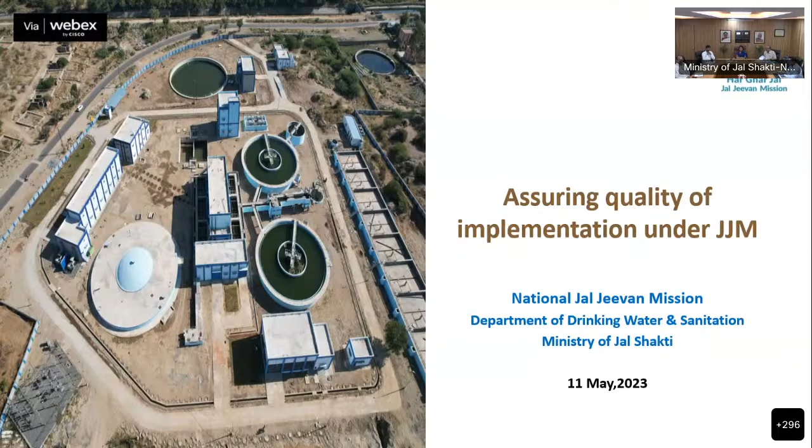First, why we need the quality monitoring system. As you are aware, our JJM goal is to provide adequate quantity and good quality of water on a regular and sustainable basis. But during field visits, we observed that functionality is not meeting the required standards, perhaps because we haven't given importance to quality at the design stage or implementation stage. If we give proper importance to quality from the start of the project, we can avoid this kind of problem.

Our objective is to design the system for an ultimate design period of maybe 30 years. But while reviewing DPRs, we found that some schemes implemented 5 or 10 years back are not providing the intended services, so we are replacing pipe material, replacing tanks. Why is this happening? Maybe the materials used on site are not of good quality, or maybe workmanship and the quality monitoring system are not appropriate.

So we need to focus on quality during the implementation stage. Most important, even if the DPR has been prepared with standard design guidelines, we have to make sure the infrastructure created on ground is in line with the approved DPR and approved practices. We observed that certain item specifications given in the DPR are not followed on ground in the same way, so the agency has to check those requirements. At some places, especially in village areas, we don't have very qualified and experienced contractors, and even some site engineers from the contractor side are not able to read structural drawings. So we need to provide assistance to them and have proper checks and balances so the work can be done properly.

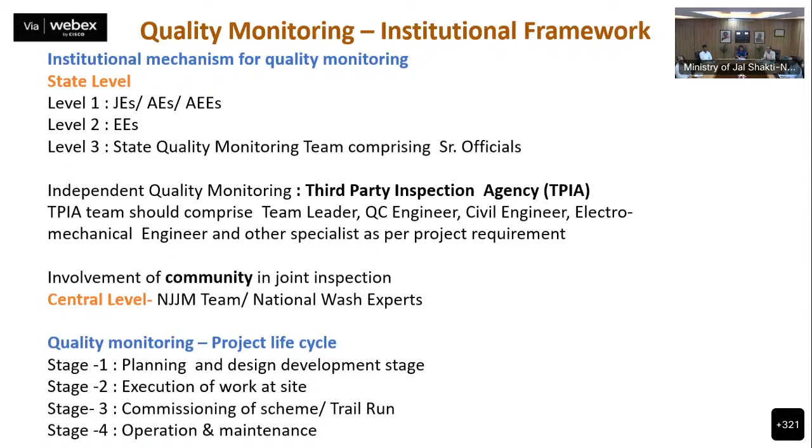Now I've tried to mention some key roles of the TPI agency. Generally, most places I found that TPI has the mandate to measure and verify the bill. But actually the role of TPI starts as soon as we award the work on the site, so TPI should be deployed at the same time we start work on the ground.

TPI should be engaged in reviewing documents. TPI staff must have copies of the DPR, tender document, work order, all statutory approvals, and IS codes, so they can understand the project, know the benchmark, what is required, and what they are going to inspect.

The second part is development of a quality assurance plan, which is very important. Normally, good contractors have their own quality assurance plan, while smaller contractors are often not familiar with it. This is basically a roadmap for how the quality system should be managed, what materials should be tested, when, and at what frequency. TPI agencies can facilitate this roadmap for state governments and contractors.

Other important things: each project scheme has different nature and components, so it's good to have a checklist of parameters for monitoring each component. One issue I observed is that TPI is often not aware exactly when a given activity is going to start, since a TPI agency may be involved in 100 or 50 schemes. So it's important to develop a tracker early on, showing at what date and time which activity is happening, so that the right staff can go to the site at the critical stage and do proper quality monitoring.

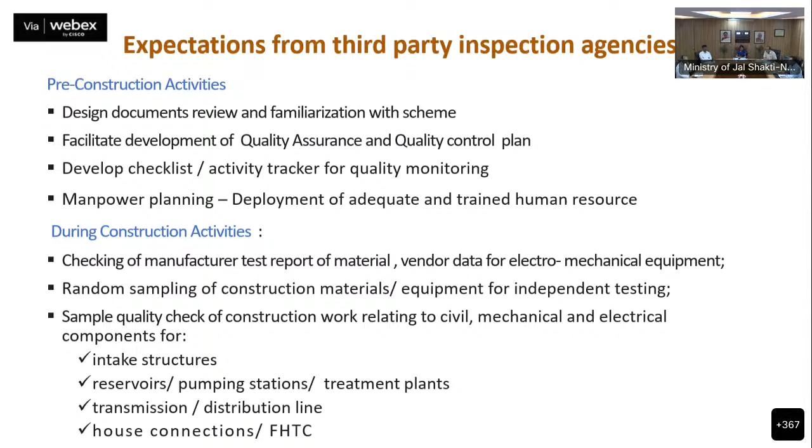Similarly, for the transmission line, once the pipe is laid at the ground, they should ascertain that the pipe has been laid at the appropriate depth, with appropriate trench width and proper cushion for the pipe bedding. We'll discuss some examples at the end of the presentation showing bad practice and good practice to give understanding on these aspects.

About compliance, we discussed the DPR compliance. What we observed on site is that maybe the DPR was prepared one or two years back, and due to various issues like site condition, land issue, or approval issue, the location of the treatment plant or the tank might have changed. However, the design is not being revised.

So it is the responsibility of the TPI agency to ensure that if there is any change in site condition, the design has been revised accordingly, and construction is carried out as per the latest design.

Another issue I'd like to highlight is about the structural drawing. Most DPRs don't include the structural drawing, nor the geotechnical survey. So when the contractor is on the field, they do the geotechnical survey, and if they find the DPR was designed with different geotechnical properties, it is important to revise the structural drawing to suit the site condition, because it will have a major impact.

Another important aspect is the measurement of work done by the TPI agency and recommending payment. I'd like to mention that we recently visited Assam, Lakhimpur district, and saw a best practice happening there. They have developed an app where they enter all the details, whether the pipe has been laid at the appropriate depth, whether concrete testing has been done. Once the information goes to the concerned person, they approve the bill. The same practice can be followed at other sites too.

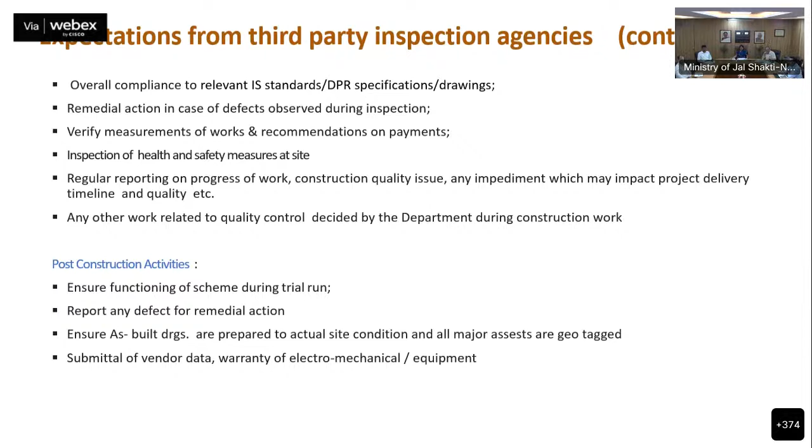Now we'll talk about the testing of material. When we talk about testing, normally we use pipes and concrete - these are two major components of the work. In any project, maybe 60 to 70% of the project cost lies with the pipe material, so it's important that we give emphasis on material testing at the site.

So pipes - mainly two kinds of pipes are being used. One, metallic pipes - I have seen DI pipe used, and GI pipe especially in the hilly region. And if you talk about plastic pipes, generally HDPE and MDPE are used.

So it's ensured that with the batch number, the material has been tested at least at the manufacturer's end. Any person can see these things.

When we talk about the material's mechanical properties, certain tests have to be done in the lab. So it's important that we select the sample from the lot and then send it to the approved lab for testing, and ensure that whatever test result we get is within the parameters.

What I have seen is some states' sample reports are available, but they don't include all the parameters. Hardly, suppose 5 tests we have to do, maybe some places only 2 parameters, some places 3 parameters.

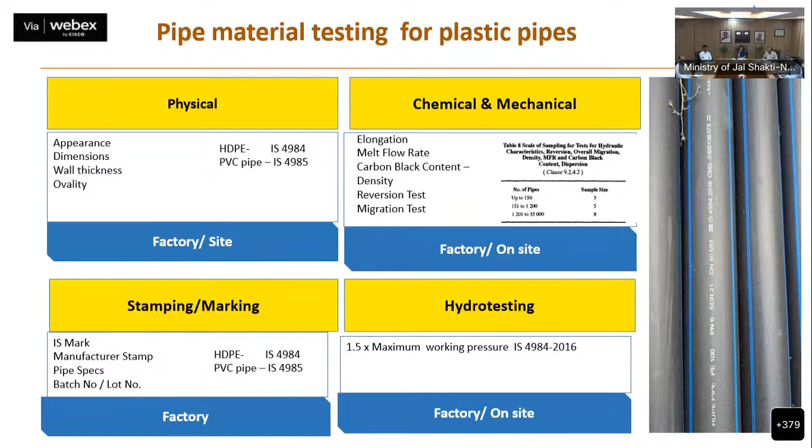If you are doing concrete work up to 5 cubic meters, 1 sample has to be collected. If it is more than 5 to 15 cubic meters, 2 samples have to be collected. Please ensure that cubes of size 150x150 are made properly. And when sampling, ensure it is done at least at 7 days and 28 days.

To determine the strength - why 7 days? Because if 7 days is not meeting the criteria, about 65% of strength should be achieved at 7 days, then straightforward the sample can be rejected. We can't wait for the 28-day rejection. So having proper sampling is an important stage of all construction work, and proper concrete testing should be done.

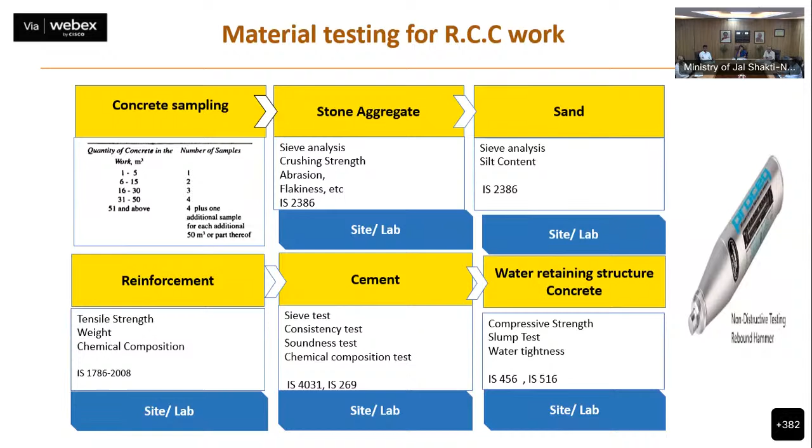This is the device which I have highlighted here. This is very important - these are all very basic digital instruments. For example, if someone wants to measure the thickness of the pipe, they can use the digital screw gauge. If you want to measure the inside-outside diameter, you can use the digital vernier caliper. Similarly, if you want to know the thickness of the coating, we can use the digital zinc coating thickness instrument.

Like how you are using the field test kit for different parameters, similarly we can have a kit of these basic instruments which can be given to the field staff. Whenever they go to the field, they can carry these instruments and measure the important basic parameters. I'm glad to know that Chhattisgarh, a couple of weeks back, organized training and gave this kind of kit to all the field staff for quality monitoring of basic parameters.

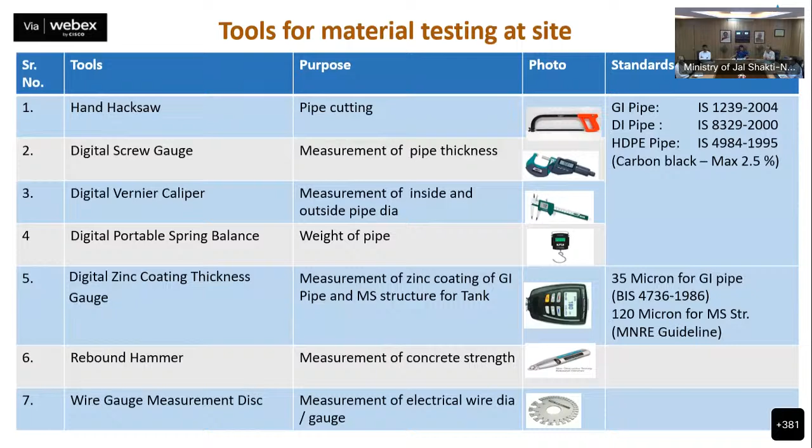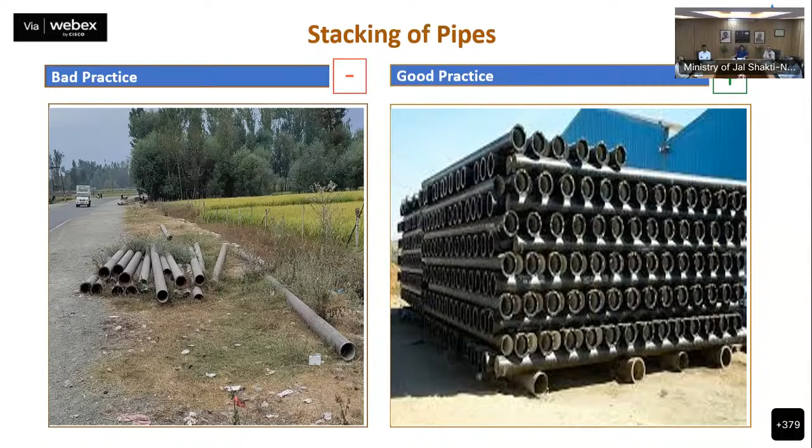Some examples from the sites - you can see some practices. It's not only about material testing and laying the pipe, it's also important that when you procure the pipe at site, how it is being stacked, how it is being loaded, how it is being unloaded and laid. Every important activity has to be taken care of, so it's always good practice to have proper stacking of the pipe material.

When we talk about pipe bending, especially for metallic pipe - if you are using plastic pipe, like HDPE pipe, they are flexible and can be bent up to a certain degree. But especially for metallic pipe, there is certain limitation. You can't bend DI pipe more than 4 or 5 degrees depending on the diameter. Once you try to bend more than that, leakage will start. So whenever there is a requirement for a bend, kindly use special fitting bends rather than trying to bend more than the prescribed limit.

Laying is one of the most important activities where we found a lot of improvement is required. As per the codal provision, if you are laying the pipe on the road and surface, minimum 1 meter depth is required. Although in the BOQ items you have 1 meter or 0.9 meter specified, in a lot of places I have seen pipes being laid above the ground.

Some places, you can see the example given here, even though pipe is laid in the road, hardly 10 centimeter trench depth is there in place of 1 meter. However, BOQ says that pipes should be laid 1 meter below ground. So kindly ensure that proper trench width is there. Minimum 200mm clearance is required because in future if you have to do maintenance work, there should be some space to use the equipment.

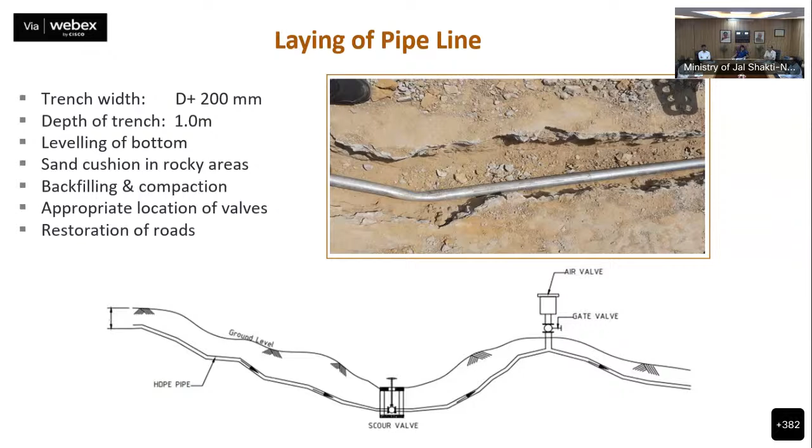Especially for placing valves, I have seen that in most places there is no detailed design of the profile of the pipeline. Normally we only get layout drawings, which don't include levels - what is the ground level, what is the pipe level. There should be a proper L-section. In case we don't have a proper L-section, it is the TPI agency's responsibility to examine whether the valve has been located at the appropriate place. Air valve should normally be at the peak point, and a scour valve for drainage purposes should be at the bottom of the pipe. These are very basic things we have to take care of while laying the pipeline.

This is a very typical example of a manifold, normally used in hilly regions. In one case, I found there are about 30 households, and directly from the tank, individual connections are given to each household, but the header is not of appropriate size. Each household connection from the tank runs up to 1 kilometer, 500 meters.

So instead of having all connections from the reservoir tank, we can have a decentralized manifold connection. We can take the main distribution pipeline, create branches, and use a cluster-based approach - maybe 5 or 6 households per manifold, giving 6 connections, and again from another branch giving other connections. This will make operation and maintenance much easier.

This will also reduce the cost of pipe, especially when using plastic pipes. I can see here the HDPE pipe is used, and construction might have been done about a couple of months back. After 2 to 3 years, the pipe is not going to sustain - it will become brittle because it's exposed to sunlight.

GI pipes, if laid above the ground, that's quite acceptable. But please try to avoid laying plastic pipes above the ground for long life.

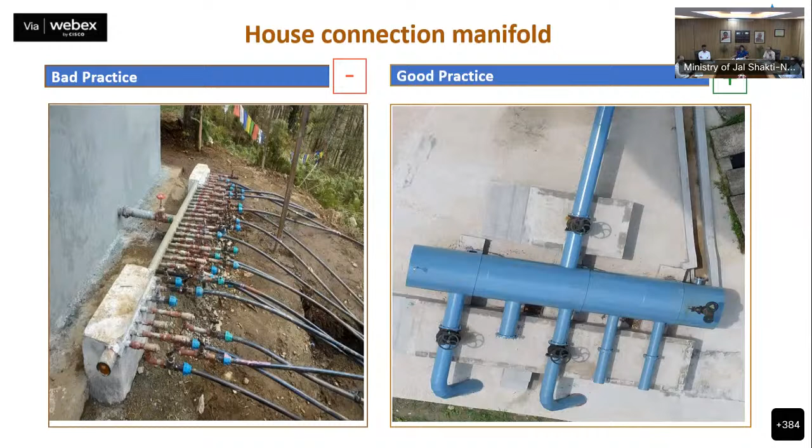FHTC is a gray area I found. In most places, except a few states, there is no consistency in providing the FHTC. In some places, FHTC through MDPE pipe or HDPE pipe is left open - you can see the right picture. On the left side, they have given a pipe above the ground with a proper tap, but there is no pedestal support.

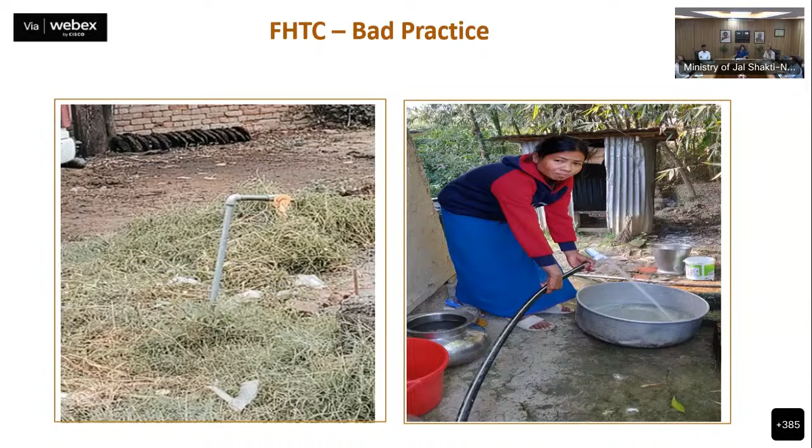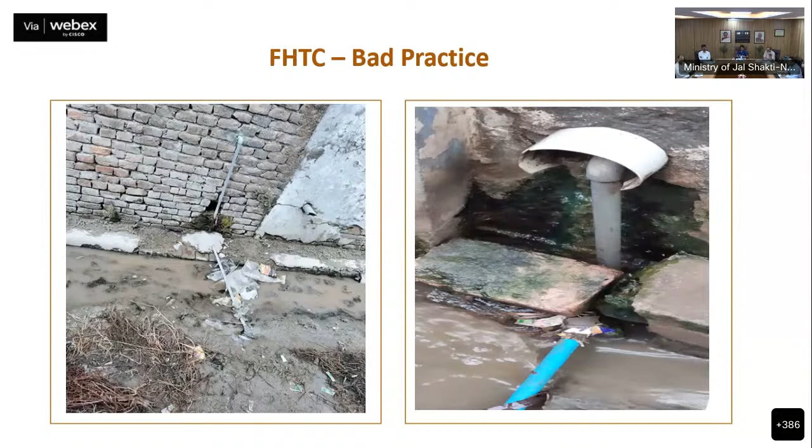In some places, the house connection pipe is laid near the drainage line, and there are chances of contamination. Even though your water is treated at the treatment plant and disinfected at the tank, once you lay the pipeline connection point inside the drainage, it is going to contaminate the water, and we won't have safe water at the consumer end. So kindly ensure this kind of connection is avoided.

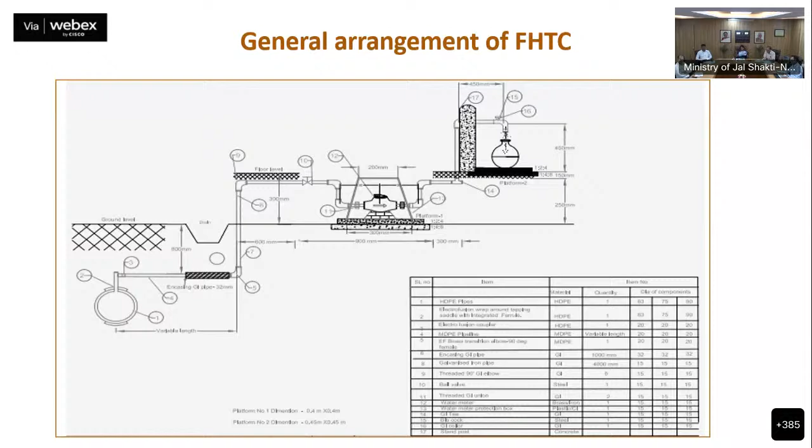For the benefit of the audience, I've also given standard drawings because I couldn't find any standard design drawings from the state during the visit. So this drawing can be used - you can see the pipeline is laid below the drain line, with a proper height for the connection and pedestal support. Similarly, this drawing shows how the platform has been properly created, and beside the platform there is a soak pit. So pedestal support, platform, and soak pit - this is the ideal arrangement.

I do agree that in some places there is no provision for pedestal, platform, and soak pit in the BOQ item.

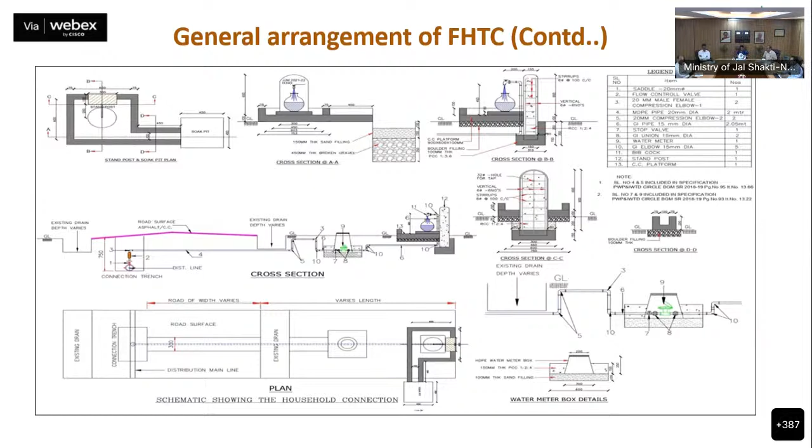But good practices we have seen in some places, as a part of community contribution, they are using this kind of pedestal support and platform. This can also be adopted wherever there is no BOQ item, as a part of community effort.

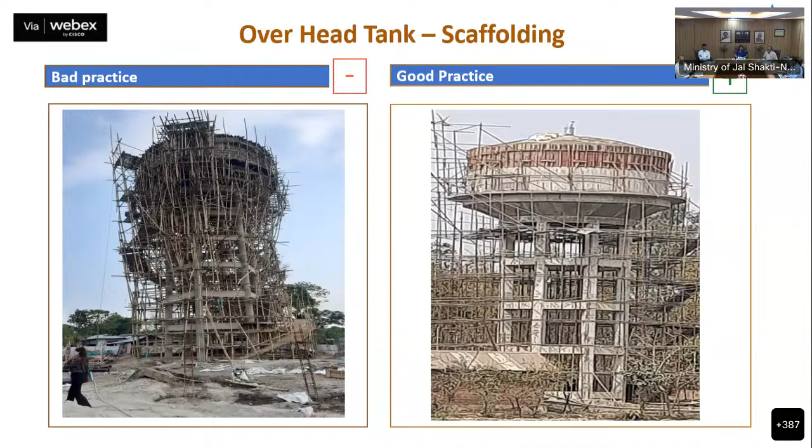This is about the scaffolding, which is a health and safety issue. On one side you can see a tank with a staging height of 20 meters, where bamboo is being used for scaffolding, which can create a serious health and safety issue. On the right side is a good example, where proper scaffolding has been used with proper support.

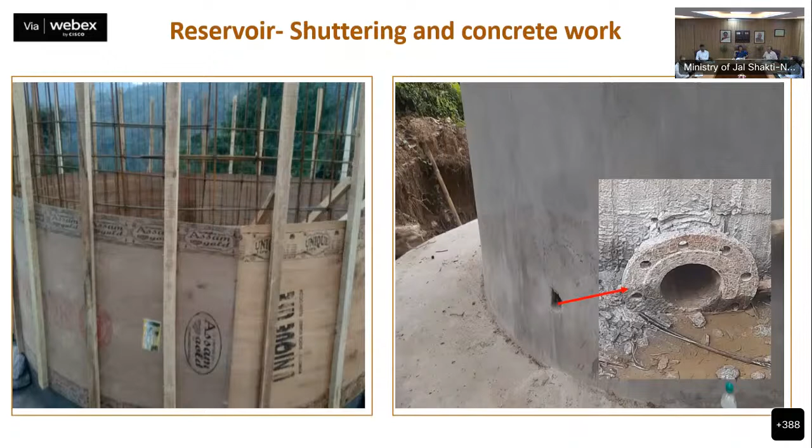It's also important that when you are casting different batches, you give a shear key and have a provision of water bar, so that it can avoid this kind of seepage.

Another important thing: when you have an RCC tank or reservoir, kindly make sure the levels of inlet, outlet, and overflow are done properly. In some places we have found the inlet and overflow kept at the same level on top of the tank, so there is no provision of freeboard. If water is coming in and the outlet is closed, where is the water going to flow? It will come out from the manhole, or similar problems will start. So make sure there's a proper freeboard and that inlet and outlet levels are done properly.

So while laying the pumps, equipment, and machinery, kindly ensure we have the proper dimensions of the equipment to be installed on site in advance, and make sure that whatever structure design you have, either for the valve chamber or the pump house, will accommodate the equipment, keeping in view the operation and maintenance point of view also.

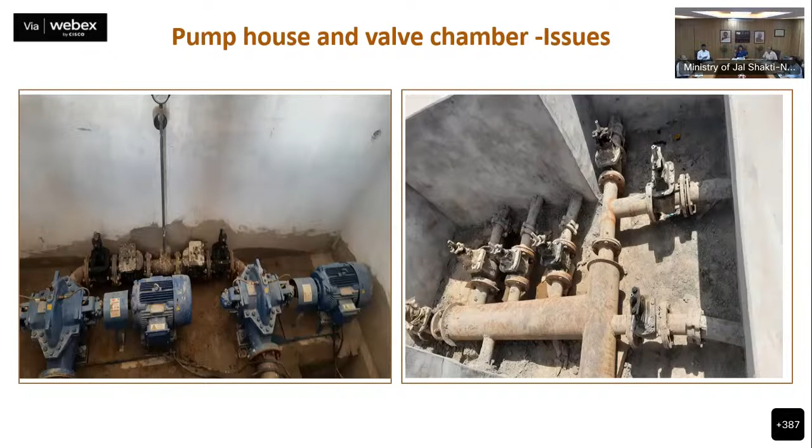So these were all examples giving you a flavor of the bad practices and good practices happening on sites all across the country.

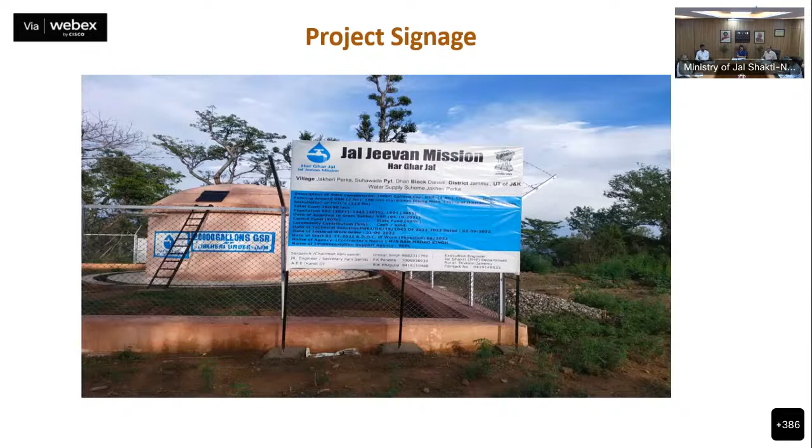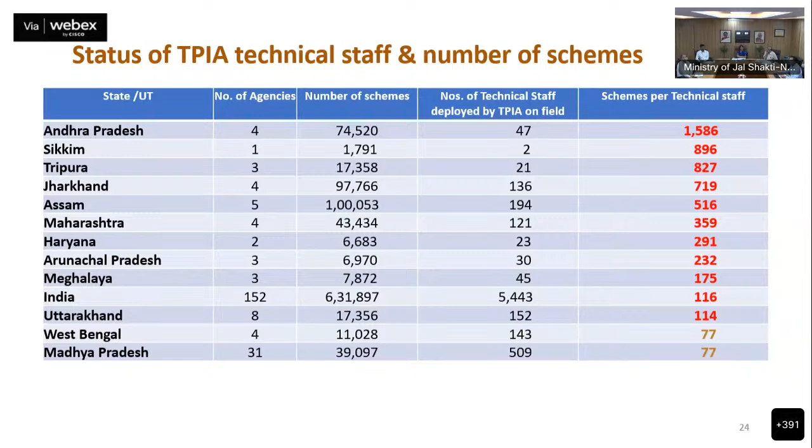This is all from my side. Next slide. We can see that some states have good examples, managing up to 20 or 25 schemes. But beyond 25 or 50 schemes, it will not be possible. So they need to have those resources. That's all from my side. Thank you very much for listening.

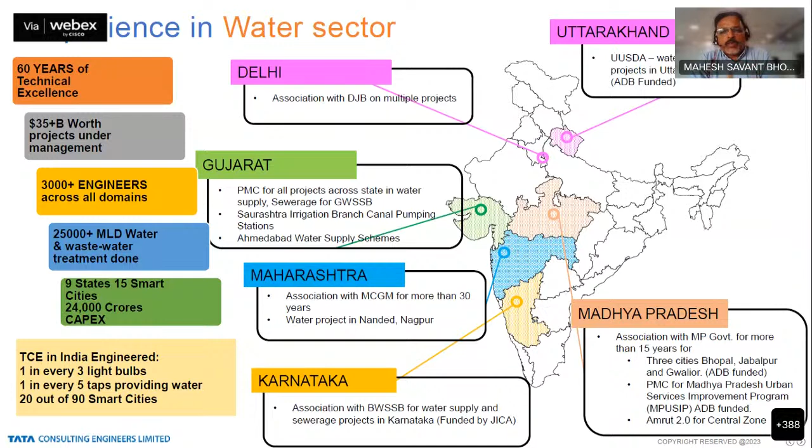Next slide. We have various types of experience in the water sector. My company works in Uttarakhand, Delhi, Gujarat, Maharashtra, Karnataka, Madhya Pradesh, on various projects, giving us experience of water supply and related structures. With that experience, we are working on JJM. This is the first JJM project we are working on, and in this we observed certain quality issues which are repetitive.

Up till now, we have allotted around 8,000 schemes, and out of that around 3,000 schemes have already completed inspection, and we are proceeding further.

If you see the first photograph, there is a concrete joint in a tank with undulation in the surface, because of poor quality formwork. They use old plywood or other material instead of regularly using MS formwork or good quality formwork, and that's causing these issues.

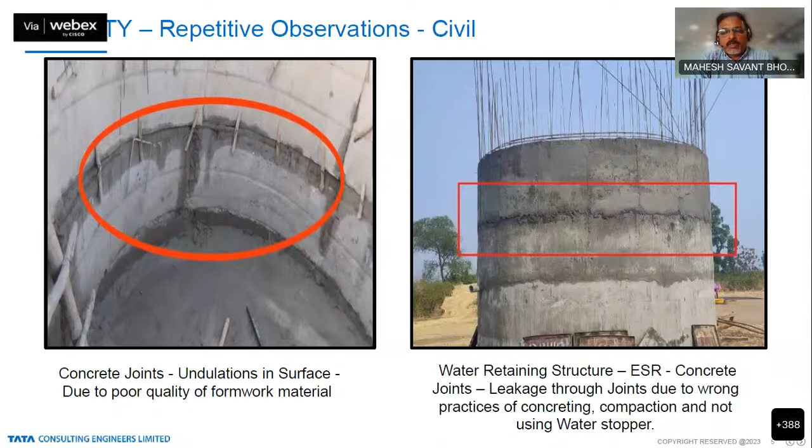In JJM, mostly all schemes are water retaining structures like ESRs. In the second photograph, there are concrete joints where leakage is happening due to wrong concreting practice, with no proper compaction. As Mr. Rana told, nobody is using water bars or other latest technology that can be used.

Further, there are quality issues with the valve chambers. You can see how the valve chambers are put up, and due to non-standard material use and poor skill set — mostly these contractors are new and don't have that practice of construction or quality practices — we see these issues.

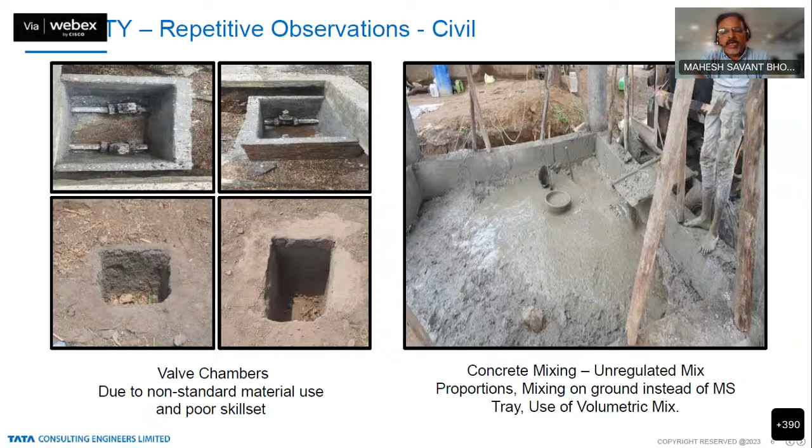The fourth photograph shows concrete mixing, with irregular mix proportion and mixing on the ground itself. At least we are pushing them to use an MS tray and proper mixing procedures.

Then there's the issue of concrete cover. In an RCC structure, cover is an important parameter for concrete, and there is no proper cover given for reinforcement. Because of that, after some time we see rusting of the reinforcement. And further, there is insufficient excavation depth.

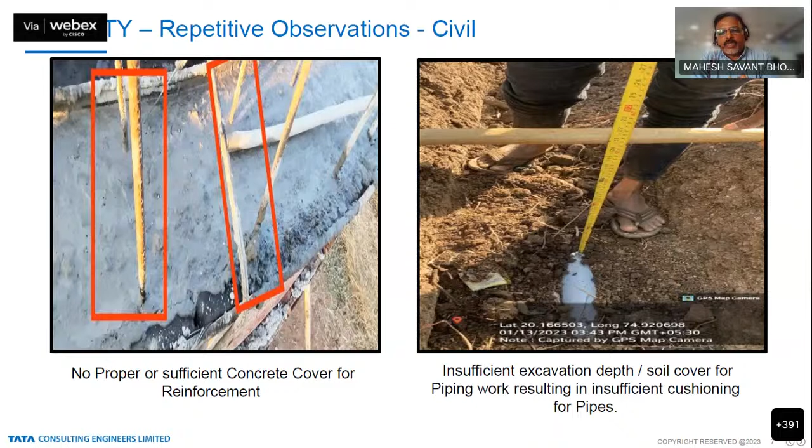In the tender or BOQ specification, there is a 1 meter depth specified, but if you go on site, we can see only 400mm or 300mm excavation. We are pushing our team to do re-excavation and put the pipe properly, but this means rework is happening.

For electrical and mechanical items, the cables used for pumps and other things are not as per specification. They are using whatever random size is available, not as per specification. We are pushing contractors to use all specified material and get it checked before installation, before putting those cables.

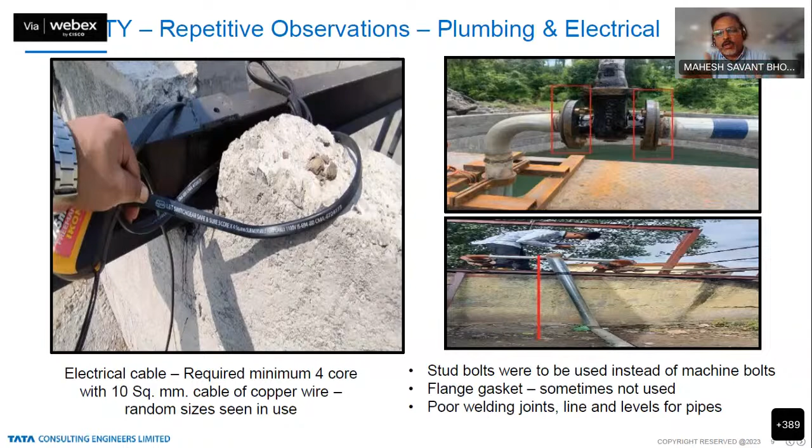Further, for pump connections, stud bolts were to be used instead of machine bolts. Then flange gaskets are not used for certain connections, from where leakage happens afterward.

Then there are electrical issues also. DB panels are open, wires are open, and there is no gland for cabling work - all should be getting sealed in electrical work.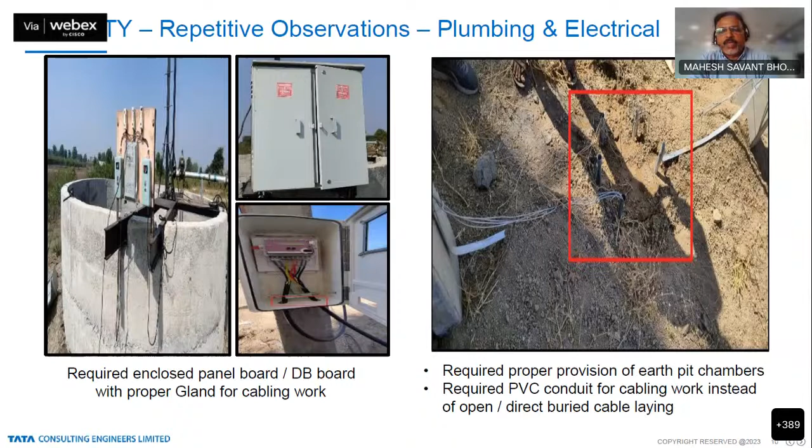Then there is the earth pit - it requires a proper pit chamber and PVC conduit for the cabling work, but there are open and direct buried cables, which is a safety hazard for all the workers, both now and afterward.

This is an air valve which is seen - that brand of air valve has to be of an approved make. A provision of the air valve has to be at a 500 meter minimum interval, and the height has to be 1.5 meters, which is also not provided properly.

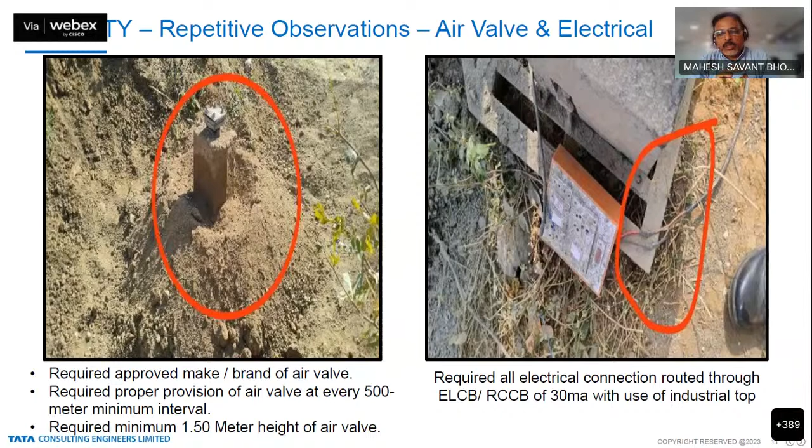Then further, the electrical connection has to be through an ELCB or RCCB of 30 mA, with an industrial top, which is not seen here.

I am not even showing all these photographs. There are certain major quality issues which are repetitive and keep getting seen, like major honeycombing in the concrete because of improper compaction, improper concrete mix, and curing not happening in certain areas. Even if concreting is done properly but curing is not happening, the compressive strength of concrete is not proper. Then the line and plumb of the RCC structure is not proper. In some places we've seen that reinforcement tying is happening for RCC work, but there is no PCC at all below the beam bottom.

There are various types of new contractors for this work - they don't know the proper sequencing of the work, so we have to try to explain to them how to work. Then the joint between brickwork and RCC work is not proper and not properly treated.

Plastering quality is also poor. Material like aggregate, sand, bricks are not as per specification and are poor quality, not properly tested. In some places we are not getting the test reports - material is getting used without being tested.

Then formwork of poor quality is being used, because of which I showed certain photographs earlier. For the RCC structure, all approved drawings are there, but when you check the actual dimensions of the RCC structure, they are not properly maintained.

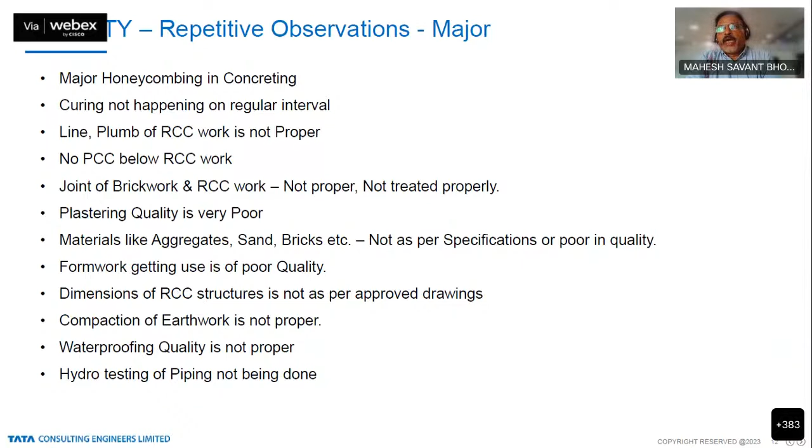Then waterproofing quality is not proper. Compaction of the earthwork is not happening properly, because of which the structure settles afterward and cracks get formed. Action is being taken to improve the quality.

As TCE, we are working in Maharashtra on JJM. There is an allotment letter coming from the executive engineer, and as per their inputs, we check what stage the schemes are at. We do third party inspection time to time, along with the SWSM Mumbai office, and we have interaction sessions with government officials in Mumbai. We prepare a detailed third party inspection report covering all information and documents we have to check, so all reports are similar and contain all data required by the government and officials. After the site report, it comes back to us afterwards because we submit it to the executive engineer, then it goes for Xerox and printing before it reaches the contractor.

Instead of that delay, for major quality issues we are putting up site instructions as our own initiative, explaining the issues there to contractors, giving site instructions and suggestions, and asking them to rectify the quality issues.

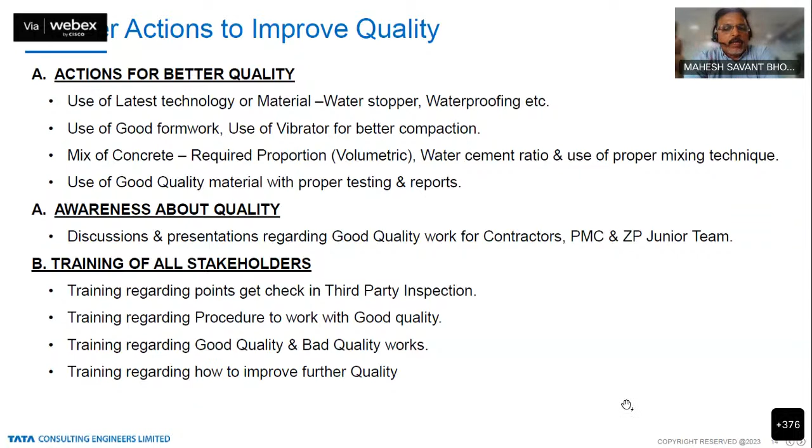So we have day-to-day improvement in quality. We also arrange training. As TCE, under CSR activities, we have already arranged 20-30 trainings for contractors and ZP team, junior team, covering what the third party role is, what observations we take, and what is good quality versus bad quality. Accordingly we do training on these points, like what is third party inspection and other related matters.

Right now we are discussing quality, but safety is also an important parameter which is lagging behind in all schemes. We are pushing for quality, but safety is a major concern. We already have training with the local team and workforce for safety, and in certain places they are using safety shoes or helmets, but we need more training and awareness about safety, mainly use of PPE, steel and aluminum ladders during construction of ESR, safety harness belts while working at height, hard barricades for excavation pits, and electrical connections through ELCB and RCCB. This awareness needs to happen, as quality and safety are both important parameters, so we have to work on safety as well.

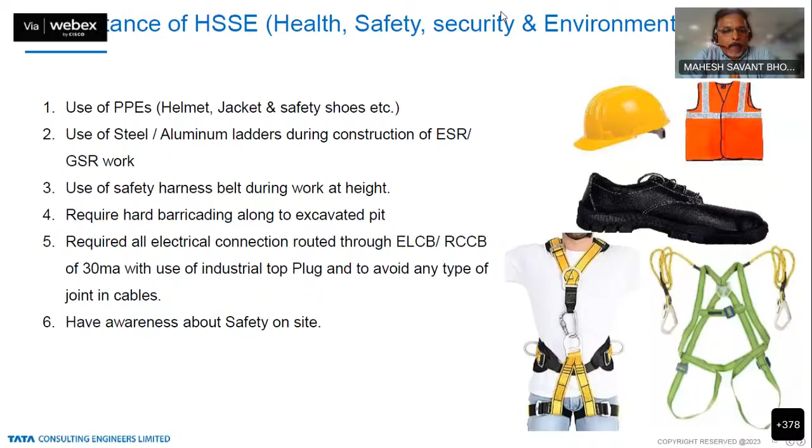Thank you for the presentation and bringing out the work that the TCE is undertaking in Maharashtra. I'm sure this would have given insights to other TPIAs who are working in almost equally challenging circumstances in various states in the country.

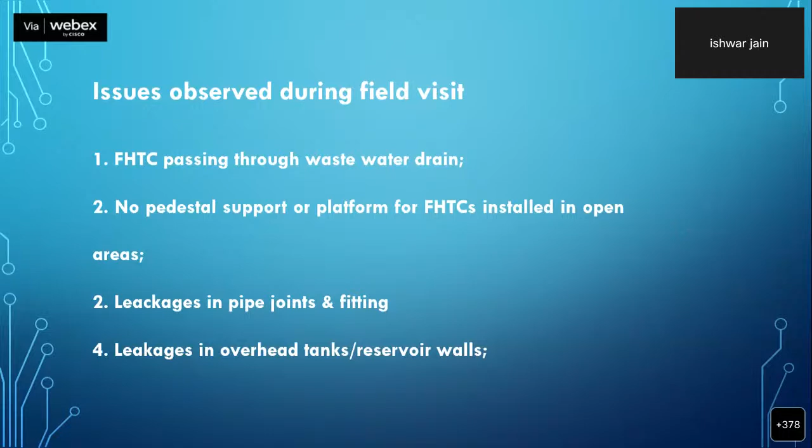The third thing is that the water retaining structure should immediately be tested for water tightness. That will give a very good idea, and continuity of work is the most important thing for having no leakages. The third thing I observed is the FTK.

Third thing is the OHSR - the space beneath the OHSR is nicely utilized by Kerala and Assam. They have constructed the district laboratory over the two bracings of the OHSR. This is a very good practice - it saves economy, saves time and money also.

The FHTC connection is what we assumed would be at one place inside the house. But nowadays the living pattern of society has increased and they are taking connections everywhere, like in the bathroom, in the kitchen, in the office, in the hospital, and...

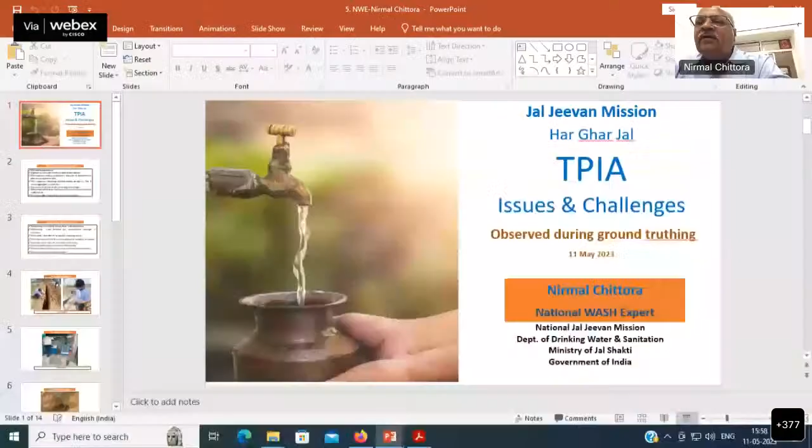What we have observed as best practices: TPIA staff is experienced, and engineers deployed are adequate in number and appropriate stream as per the requirement of the water supply schemes. I would like to comment that there is a difference in MVS and SVS. In MVS, whatever number is deployed, if they deploy the same number in SVS, then it is difficult to monitor SVS because in SVS the number of contractors and sites are more, while in MVS it is controlled. TPI engineers test equipment and pipes etc. at the manufacturer's place as per approved QAP. These are the best practices.

What we have observed is TPIA engineers witnessing material testing at site, especially this. Please go backward - you can correlate this from your site visits, yes.

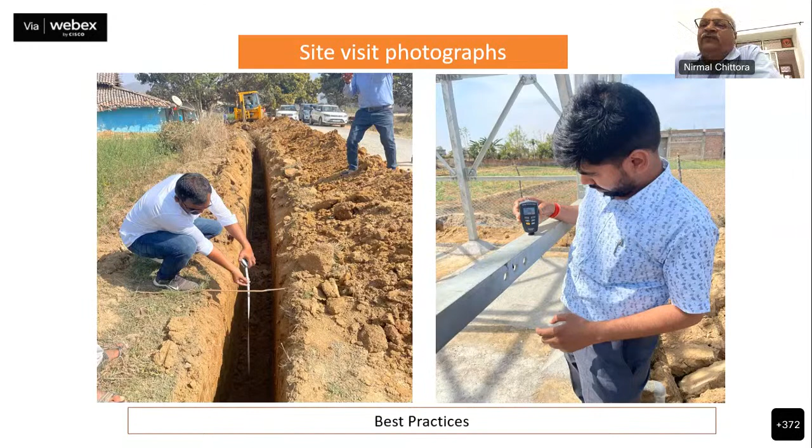And these are a few site photographs showing best practices - TPI using non-destructive equipment for measuring the thickness of GI coating. These show TPI witnessing concrete compressive strength testing, and they are witnessing the concreting also in some places.

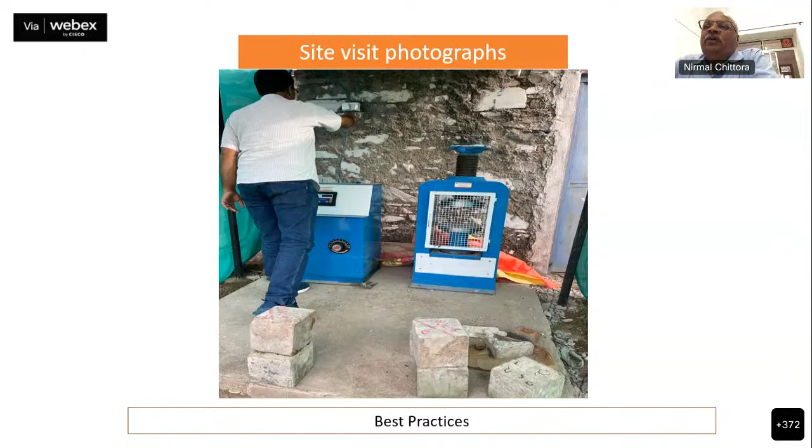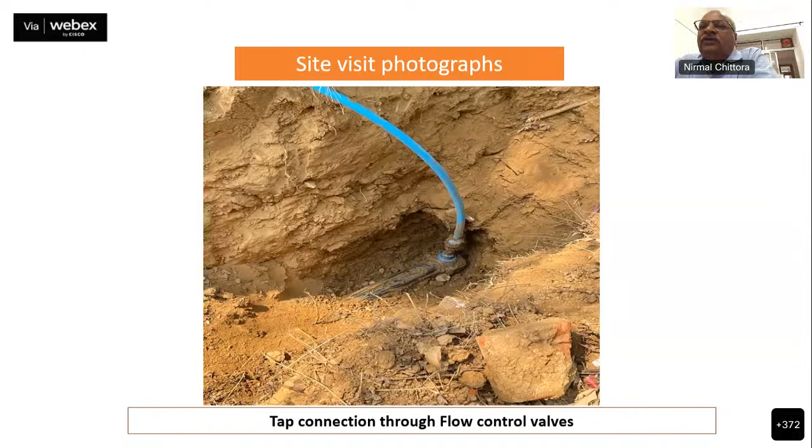Next please - these show them witnessing the house tap connection with the flow control valve, which is most important in this JJM.

It is poor workmanship when construction works are allowed with certain notes only, and those ATRs are also not observed, allowing house connection without completion of source, service reservoir, and transmission lines.

It is also an important issue that house connection is given and the water is not there. So people are unhappy with that situation.

Poor quality of work with observations not monitoring the ATR, not evaluating the yield of source, especially in case of open wells and tube wells, ground sources, where yield is most important. After a few months, sources go dry and the schemes are defunct.

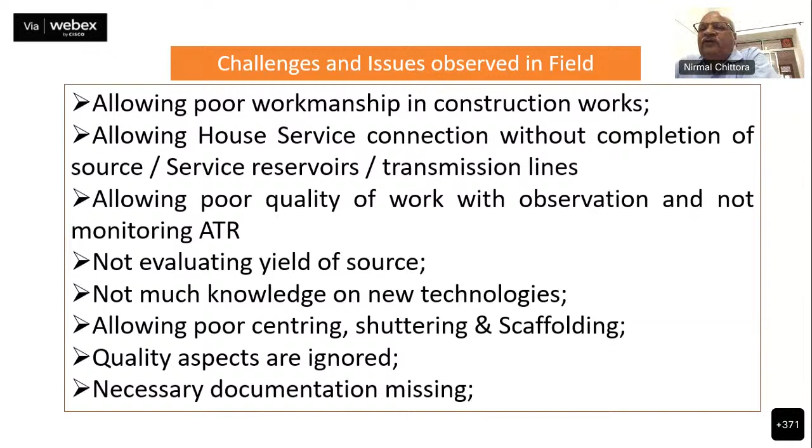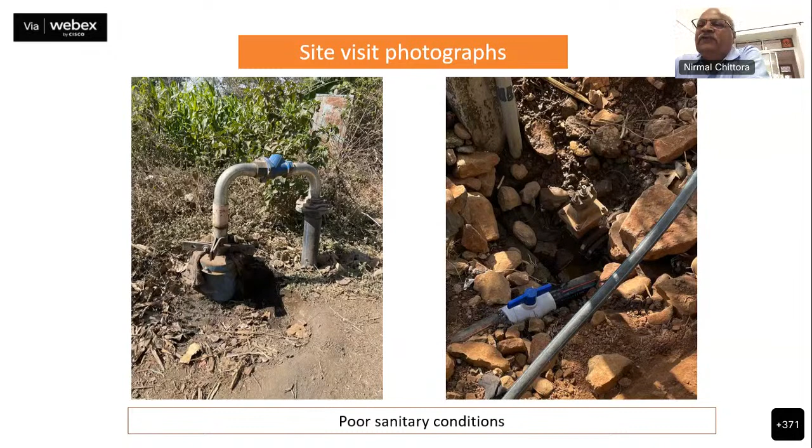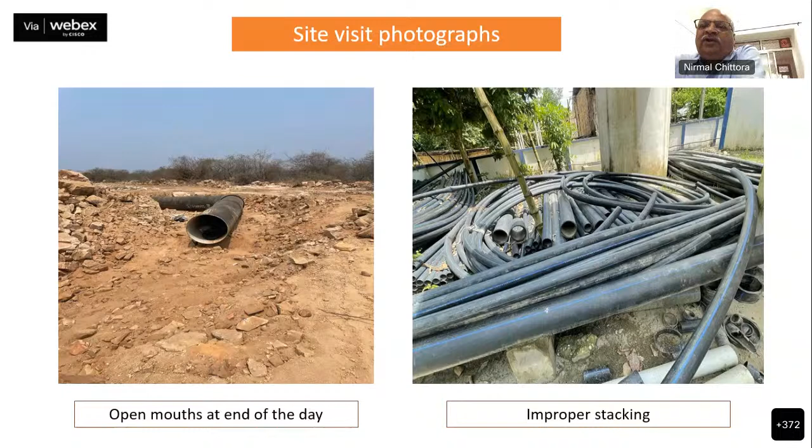Some photographs I'll share with you. These are insanitary conditions of the tube wells, no concrete sealing, no valve chambers. Leaving the open mouth after the work means if something falls inside, it will not come out, causing choking, and there is poor stacking of the pipes.

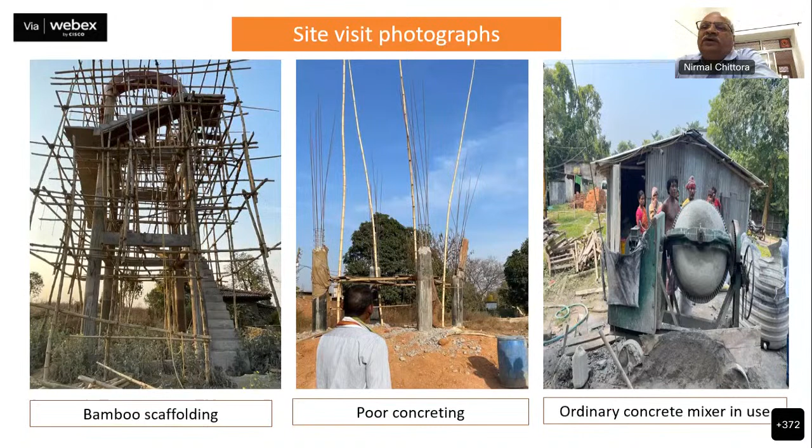Next please - these bamboo stacking, bamboo scaffolding work, poor concreting and poor plumbing also. These above-ground GI pipes are without ferrule connections, and everything is on the road. These hanging meters, and tap connections without taps, only with the valves - all insanitary conditions. So this should be given importance.

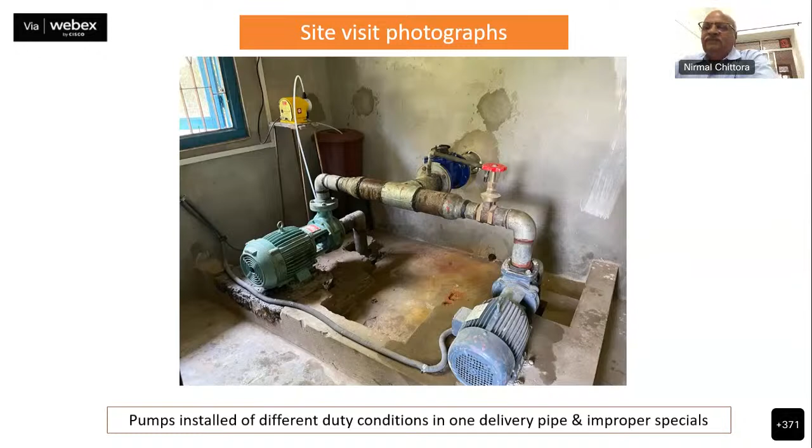One more thing - material is checked carefully and inspection has been done, but the combination of different duty pump sets installed with one delivery line and without check valves - they should also see these things. Not only this. Thank you.

So, since we are short on time, we request colleagues to quickly respond. Chhattisgarh, are you there? Yes sir. Please share with everybody what you are doing in terms of ensuring quality of works under JJM in Chhattisgarh. Sure sir, I'm Ajay Kumar Sahu, Chief Engineer, Chhattisgarh, posted at Jagdalpur.

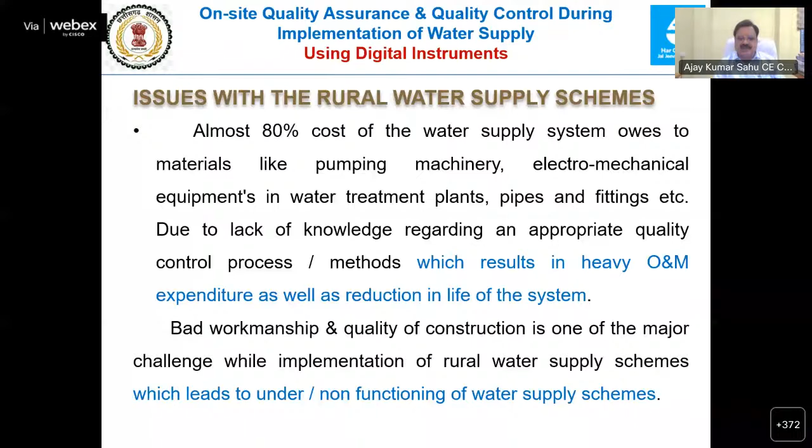These are the things which have been discussed, that 80% cost of the water supply projects is material, and during implementation we have to control the quality of the work. So we have here to go control the quality. First, we should know what are the norms and guidelines, then we should plan, document in the tender, and monitor during implementation.

What we did in Chhattisgarh, I will go quickly. We immediately source the quality of water at source. With digital instruments we check the initial quality of water of the source, like pH, TDS, iron, fluoride, chlorine, which is abundant in Chhattisgarh. If it is okay, then we go further for execution.

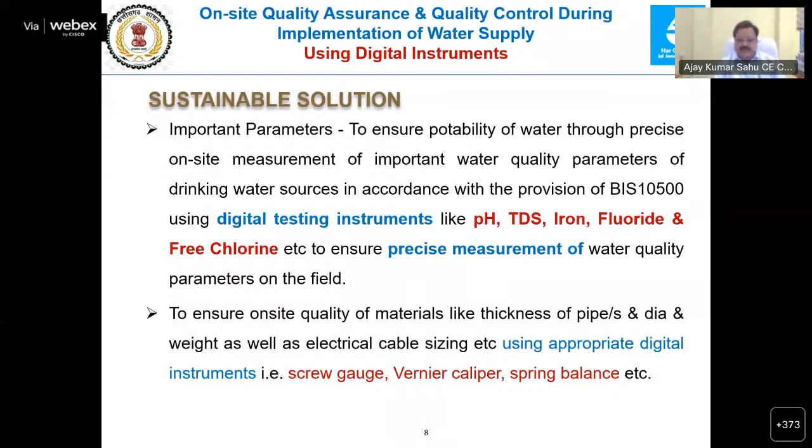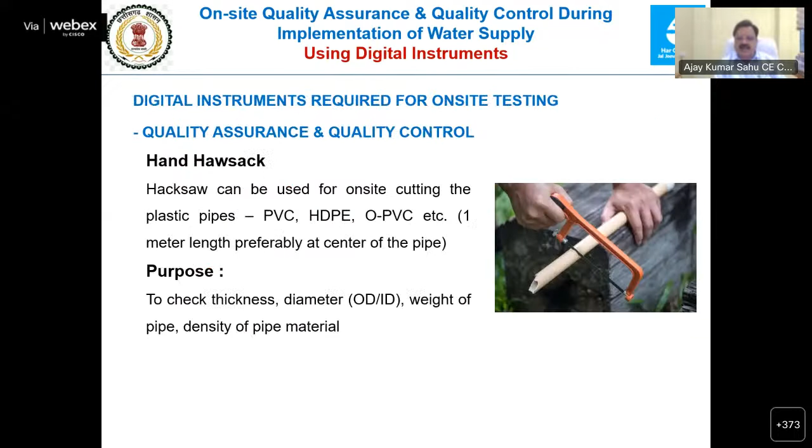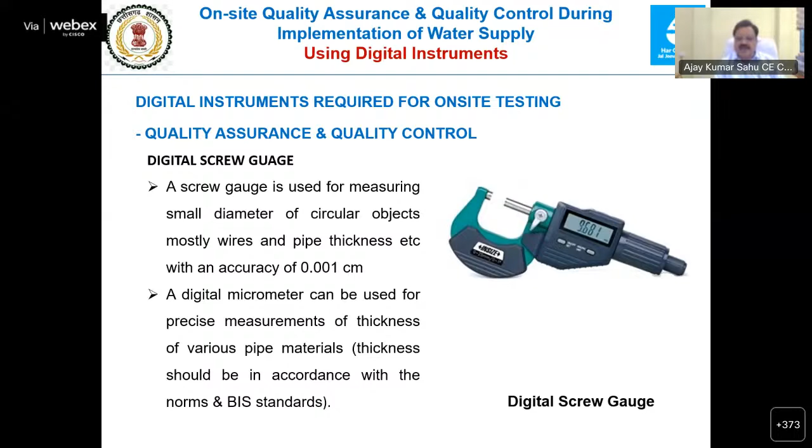We have introduced digital instruments. First, we need this hand hacksaw so that we can check the thickness of the pipe, by digital screw gauge, vernier caliper for inner diameter, outer diameter of the pipe, as per the guidelines, as per the BIS standards. Then we use this zinc coating meter.

We are exclusively installing solar power pumps, and in solar power pumps MS GI coating, zinc coating is there. So we use this at the site to measure zinc coating as per MNRE guideline. The thickness of this zinc coating should not be less than 120 micron, and for other pipes it should be more than 28 micron as per the guideline.

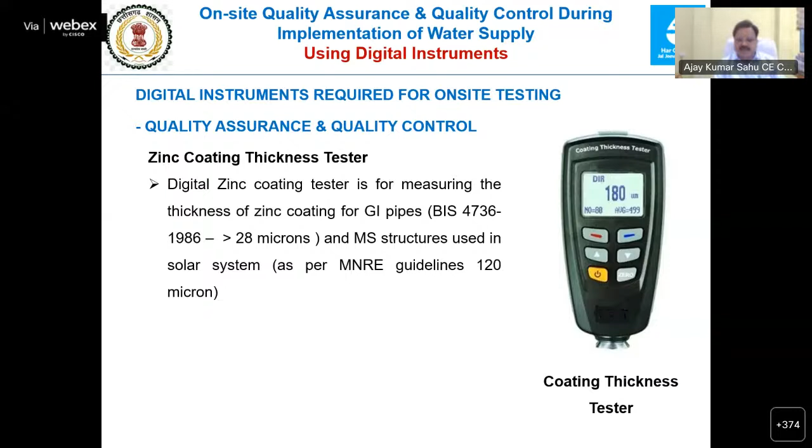Sometimes epoxy is used in the storage tank or surface of the pipeline, then thickness of this epoxy coating can also be checked in the field. This instrument we are using directly in the field for quality control.

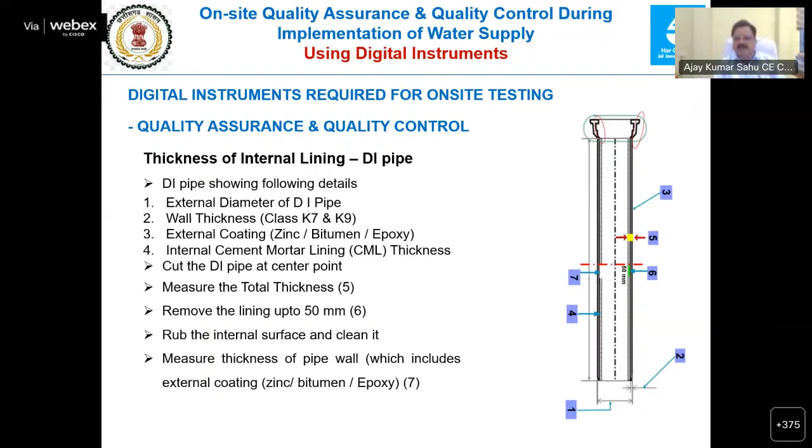Then for the DI pipe also, external diameter, wall thickness, zinc coating, bitumen coating, internal diameter - all things can be checked in the field for DI pipe. We use this digital spring balance, sometimes required, to check what is the standard weight of material per meter, which is prescribed in our guidelines, BIS standard.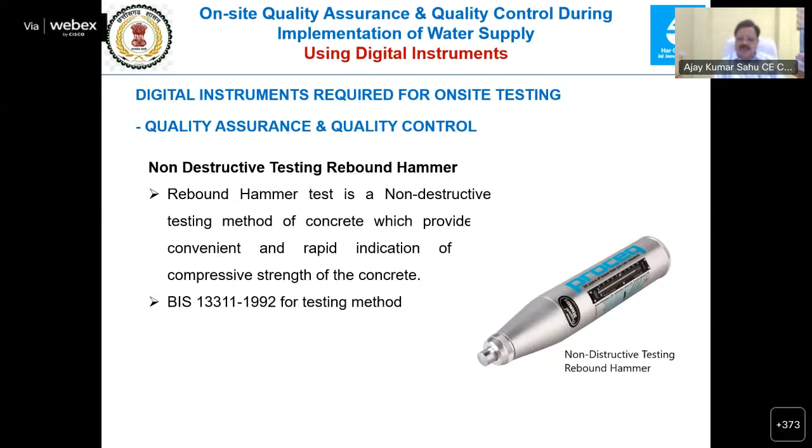We use this magnetic compass to fix the direction of the solar pump. Our solar panel should face south direction, so we use this to check whether it has been installed in the proper direction or not.

We use this angle digital degree protractor to fix one direction and one fixed inclination of the solar pump.

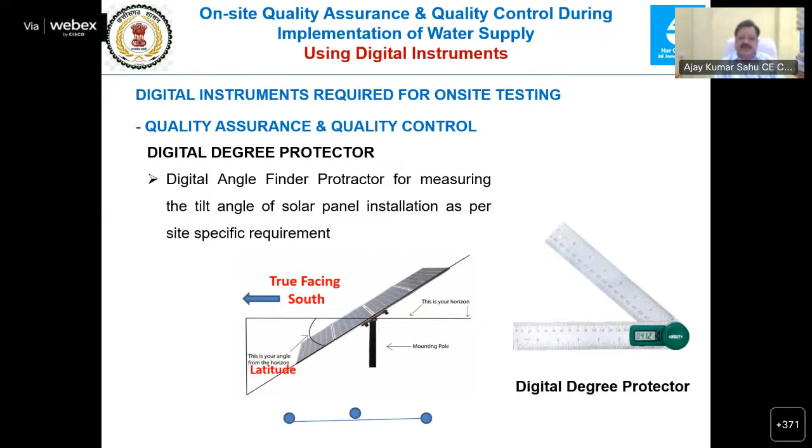We use this multimeter for measuring volt and ampere of the solar or other electrical equipment.

We use this wire gauge for checking the thickness of the wires used in our water supply system.

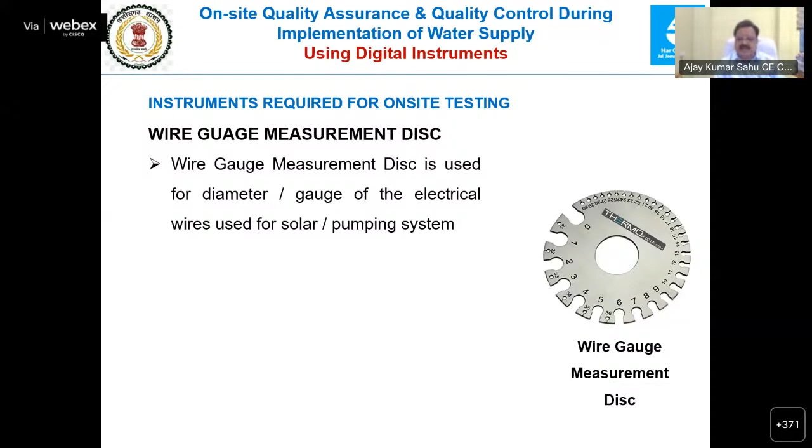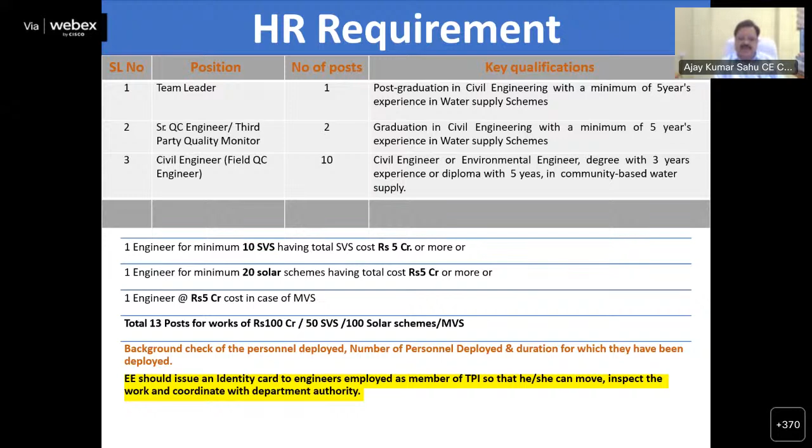We have deployed TPIs. 13 posts are required: team leader, 2 quality control, 10 field engineers, for 100 crore work, maybe SVS, solar, or MVS. These are the scope of work.

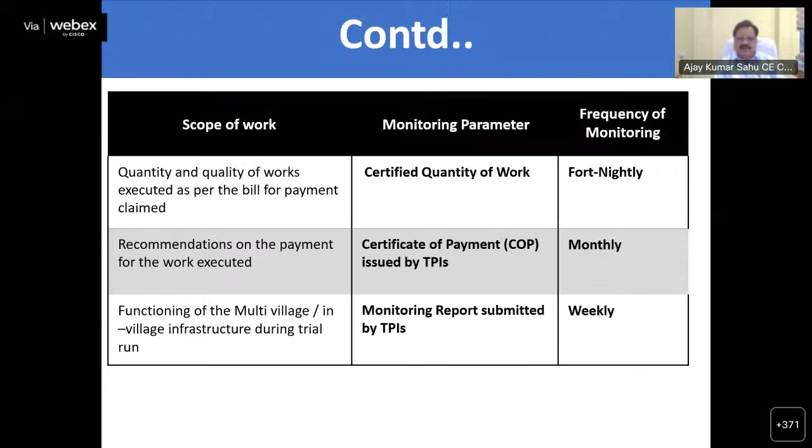For our third-party agencies, these are the roles and responsibilities of the pipeline worker. They have to check depth, width, and diameters of the pipe thickness, and we also do post-delivery checks.

We send the sample to CIPET again. Initially, we get the report from CIPET, then thickness can be checked at site.

We have installed a muffle furnace at all division levels so we can have quality control of the content of the PVC pipe, and we send it to CIPET again for third party testing, then we use it in our work.

For FHTC work, we are dedicatedly meeting what is shown in the picture: flow control valve, then composite pipe for connection, and the tap we are installing.

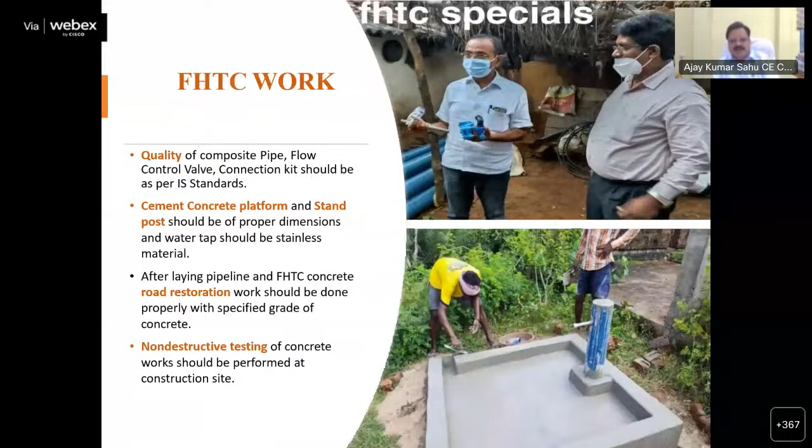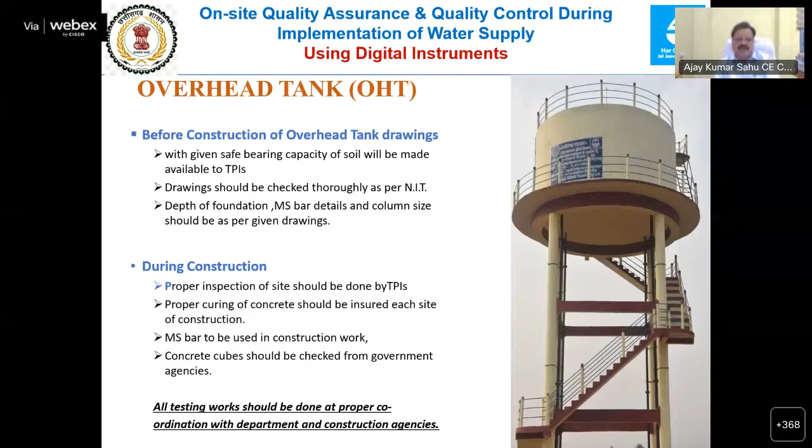For the overhead tank, we do concrete tests and mix design before execution of the work. All material tests we are doing, and we are asking TPI agencies to take all these parameters also.

For the pump, we are using a 5-star rated pump, panel, suction with ISI mark, suction pipe, etc. Panels and MCBs are installed on a wooden board inside the pump house.

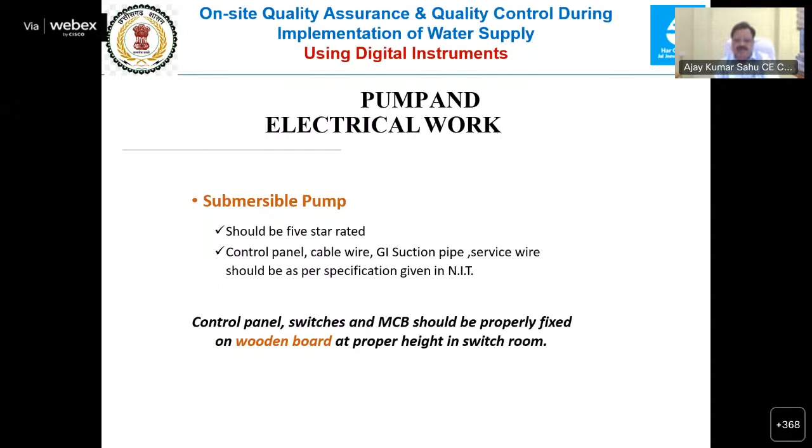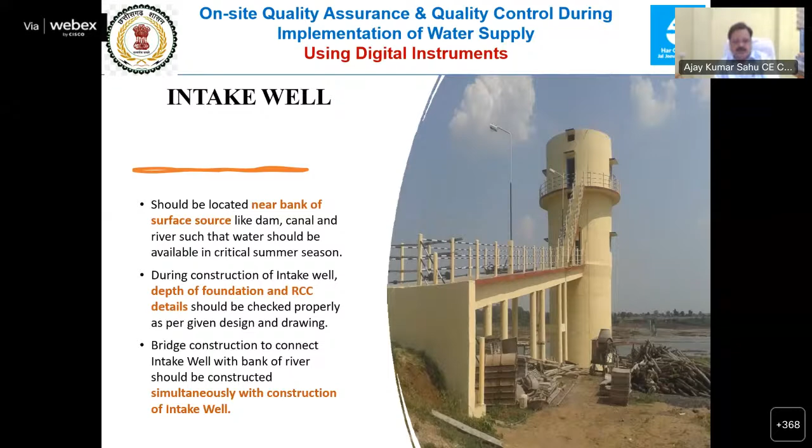For the water treatment plant location, while preparing the DPR, we fix the location, and all checking is done as per the drawing and design of the work. We also ensure the TPI makes a work register.

The work register is specially prepared by the TPI agency, showing name of work, agency, agreement number, estimated cost, and TPI measures. In the work register, particulars of the item and quantity executed are entered, and it gets signed by the third party engineer, our departmental sub-engineer, the VWSC member, and the contractor.

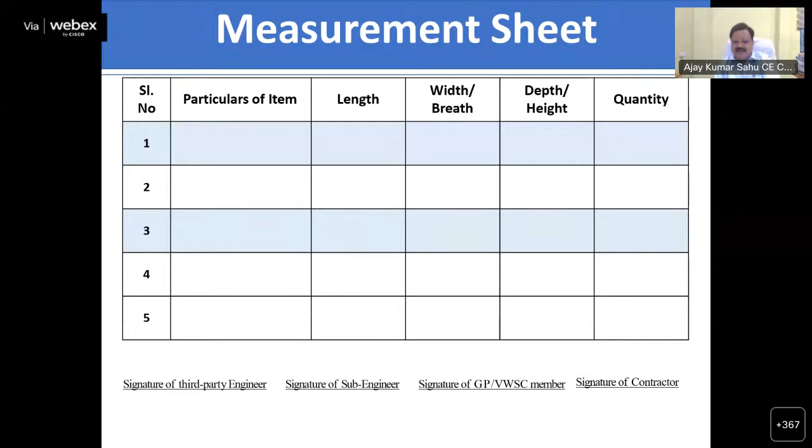This practice we are doing in Chhattisgarh. Thank you, sir.

That is one thing. The other thing is that for project management consultants, we have one for each multi-village scheme. Each multi-village scheme independently has a project management consultant team with sufficient manpower, and they are given all the activities listed out as to what action they are to do.

And what is the list of activities that they are supposed to do — that is one thing with respect to multi-village schemes for project management consultants.

The two other specialties we have in Karnataka: one is with respect to the pipes. Since multi-village schemes have most of the component as pipe work, and most of the pipes used now are HDPE, we have empaneled CIPET as the sole institute to monitor and independently test the quality of the pipes.

The other specialty is that all pipe samples are collected by CIPET staff themselves. They are supposed to collect the sample on their own — the department engineers or the contractor will not give samples to their laboratory. CIPET staff are empowered to collect the samples on their own by deputing their own staff and giving us the test results.

That is one specialty that we have. And the other thing which Karnataka has got is a cell specially created for monitoring quality. We have a state quality monitoring cell at the headquarters, where we have empaneled state quality monitors - retired chief engineers, superintending engineers, and executive engineers with vast experience in planning and design of drinking water supply projects. Around 80 such engineers are empaneled in our state, after strict interviews and a proper selection process.